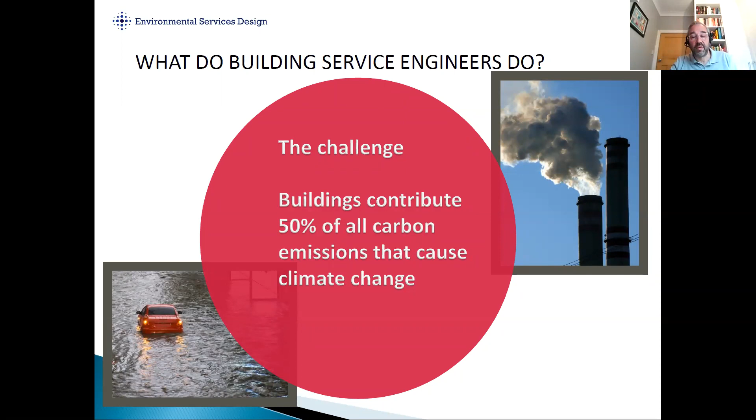The aim, ultimately, by reducing carbon down to net zero, is still to keep buildings comfortable, safe places to work and live, but using ever more efficient equipment and system design techniques. The types of products and systems we design now include LED lighting, photovoltaic solar panels, electric heat pumps used for generating heat in place of boilers, heat recovery on ventilation systems to capture heat often discharged from buildings, solar panels to generate hot water, and passive systems whereby we use the building structure to cool a building overnight using cool nighttime air to save on the energy required for air conditioning the next day. Some of these may be new techniques and terms to you, but they're going to become commonplace and easily recognised through a lot of your adult life.

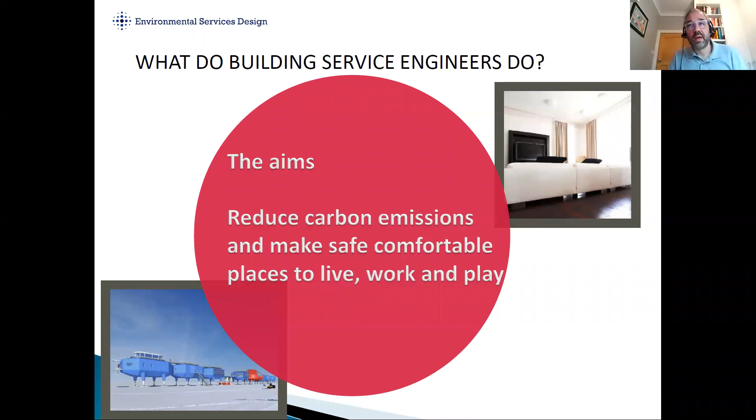In terms of the scheme at South Kilburn, this is a scheme where ESD have been employed by Brent Council, with the architects Pollard Thomas Edwards and the rest of the designers, across 3 of the phases. It's a multi-phase redevelopment at South Kilburn. We've been employed on 3 of those phases over the last 4 years, and within those 3 phases we will deliver over 600 new homes.

Our role, certainly in the pre-planning stage of the scheme, is to look at the building's anticipated carbon emissions and help reduce those, making them comply with the government legislation I mentioned before, and the legislation imposed by the Greater London Authority. Then we look at the planning of energy distribution around the site. At South Kilburn it's quite exciting for us because they have a district heating system that runs with low carbon technology and provides heat to all the buildings.

We look in a very detailed way at how we stop the new dwellings from overheating. The increase in external temperatures through global warming causes a huge problem for residential overheating, and that's something we have to design out at an early stage. Then, ultimately, we plan and design the systems for each of the new buildings and homes within them, everything from TV outlets, Wi-Fi, power, heating, and ventilation that we've touched on before.

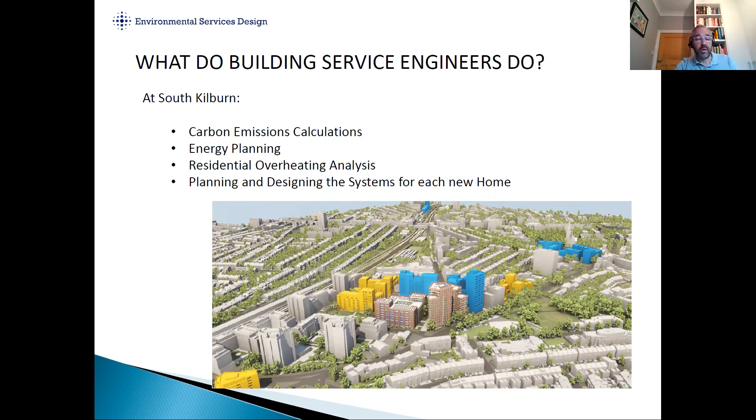Thanks, John. Hi, it's Joe Lingard. So as John was just saying, physics, science and maths really are an integral part of engineering. It underpins everything we do in the design and calculation aspects of the job. Different projects, different designs and different engineering are all going to be based on fundamentals found in physics. We use different calculations for different projects - if you're a structural engineer you'll be doing a different calculation to an electrical engineer, and likewise mechanical. But it all draws back to the basic principles of physics, maths and science, and it's wrapped up in calculation software tools now, which makes our lives a lot easier. It's fundamental knowledge essentially at this early stage.

So what calculations and formulas do we need to use, and why do we need to use them? We calculate voltage drop for electrical systems to ensure the system is as energy efficient as it can be. We calculate light emissions from different sources, whether internal or external lighting. We calculate the thermal transfer between materials, to work out heat losses and gains from buildings. And we calculate pressure losses in pipes and air ducts so we can size pumps and pipe work properly.

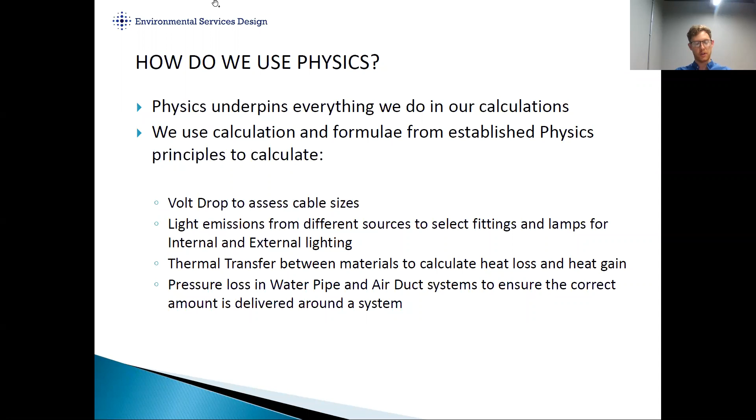So yeah, I'm going to pass you over to Will now, who's got some more examples of physics equations he's going to run through quickly. I'm Will, and unlike Joe, I'm a mechanical engineer, which means I deal more with the heating, cooling and ventilation side of buildings, rather than the electrics. We have to use some equations you can see here. The one on the top left, specific heat capacity, is the most basic and fundamental formula I use in my day-to-day work, as it works out how energy equates to different mass and temperature. We use that fundamentally for working out how much water needs to go down a pipe. We also use more complicated ones - you might not know it, but that's Bernoulli's equation, which relates pressure, velocity and the amount of water going down a pipe.

We can use that as the first principle, rearrange it, and use it to get the equation in the bottom left, which is the equation used for an orifice plate. An orifice plate is something in a pipe that you can use to measure the flow down the pipe, using the difference in pressure at two different points, two different widths.

It'd be quite hard to do that from first principles every time you needed to measure the amount of water going down a pipe. So instead we put it into software, or a table, and we can just use the pipe size and the pressure difference to make it easier for us, without having to go straight back to the complicated equations.

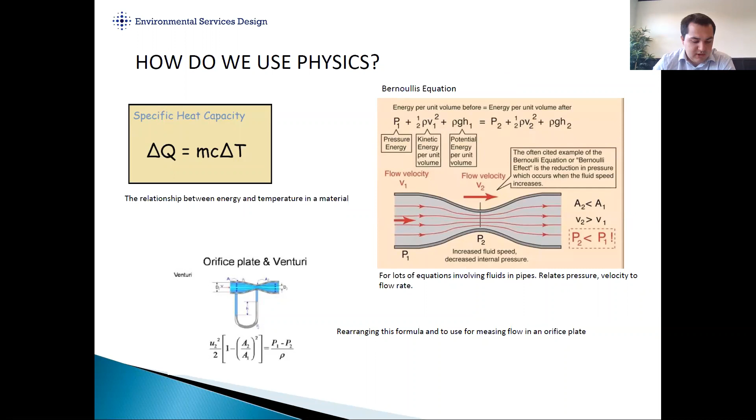Yes, there's another example here of how we use physics, this time in electrical engineering. We've got Ohm's law and a power equation, used to calculate voltage, resistance, and current in electrical circuits. Some of this work was done by German physicist Georg Ohm back in 1827, and it still holds true today. It's used daily in electrical design tasks to calculate how much power a circuit has or needs, and we use it to size cables, protect devices, and carry out load assessments. You can analyse systems and make sure they're operating correctly. It's not just used in building services, it's used in electronics as well, and a wide range of other topics.

So these form the foundation of first principles, but as engineers you need to have that basic understanding of them. As Will alluded to, we combine design tools and software so that we can carry out our tasks quicker, without having to go back and do complicated equations all the time. The standard tables and design software help us do that, but it's all based on these first principles we're showing you today.

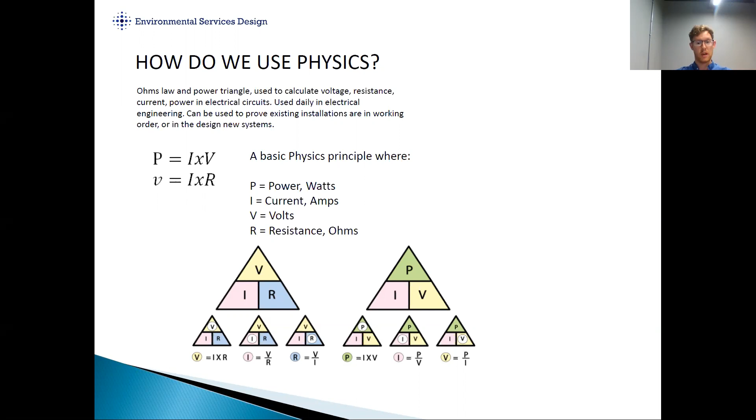Moving on to the next slide, there's another example here of a physics and mathematical equation used in lighting design, to calculate the lighting levels in a room or space - the inverse square law. The basic intensity of light decreases with the distance from the source. Using this equation and others like it, we can calculate the amount of lux, or light intensity, on a surface at a specified distance.

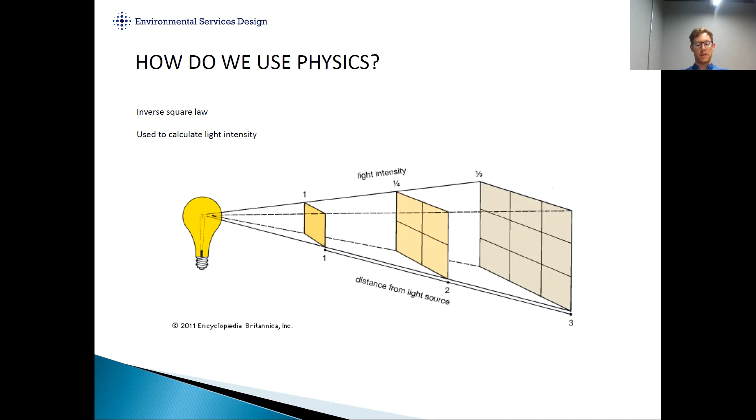So these formulas and equations form the backbone of the software that we now use. We'll generate a 3D model nowadays, and we can position lighting in certain areas to make sure we're achieving the levels that we need. Next slide, we've got some more software tools.

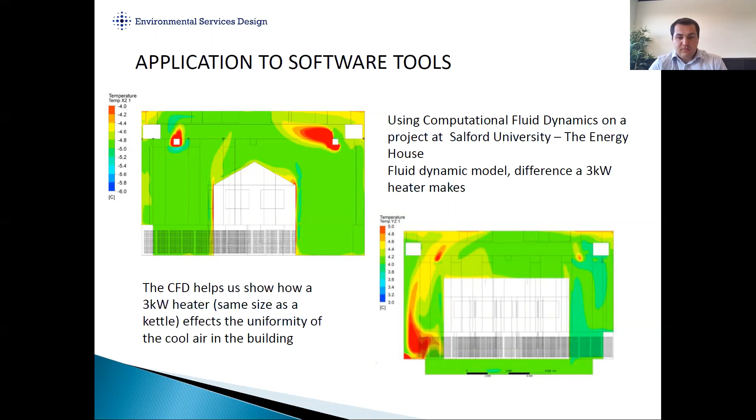And make sure it's hitting your specified levels. You work to design guides and criteria. So in this particular project down in Norwich County Council Chambers, a large refurb project, they had a large marble wall and we were providing internal lighting to that space. We wanted to make sure it was well lit, but we weren't going to be having glare issues from the marble wall. So we've set the calculation up, as you can see, and we've specified certain calculation planes at different locations.

This is based on similar equations to what we highlighted before. It's just another way that it's applied to this sort of software, and it's easy to manipulate. Once you've built the model, you can play around with the light positions until you get the desired outcome. And our job would be to then produce drawings in CAD or Revit, so an electrician can go and install that lighting where it needs to go.

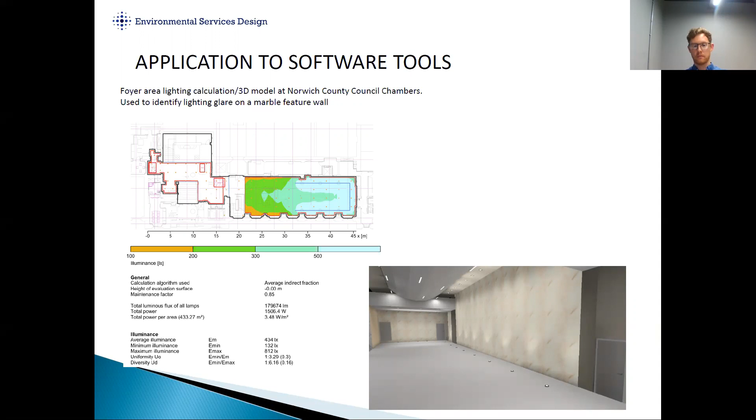We're going to move over to some examples now. Will's just going to run through.

I said earlier that the specific heat capacity equation is one of the most common equations that we as mechanical engineers use. So this is just a quick example of how we'd use it. I don't know if you've got a pen and paper or a calculator and want to try and work it out as we go, but I'll talk through it anyway.

So what we're thinking of here is if we've got 2.8 kilograms of water flowing down a pipe, and we know that the water's flowing at, say, 80 degrees and coming back at 70, so there's a difference of 10 Kelvin or degrees. We want to work out how much heat that is depositing to, say, the radiators or the other equipment that's at the end of the line.

So we can then use this Q equals MC delta T equation. The Q would be the energy or the power that we're getting at the radiators. The mass is the 2.8 kilograms of water. Specific heat is given for the material, so 4.182. And the delta T is the difference in the flow and return, which is 10 degrees. So if you put those numbers into the formula, you'll get the 117 kilowatt value.

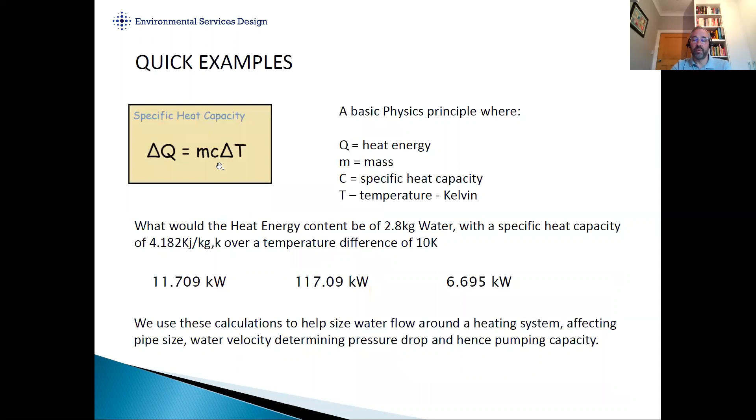And then we can apply that into this formula, the Q, to calculate how much water needs to pass around the system, which feeds into the schematic that we'll explain. So everything's kind of interrelated, particularly on those elements of the scheme design.

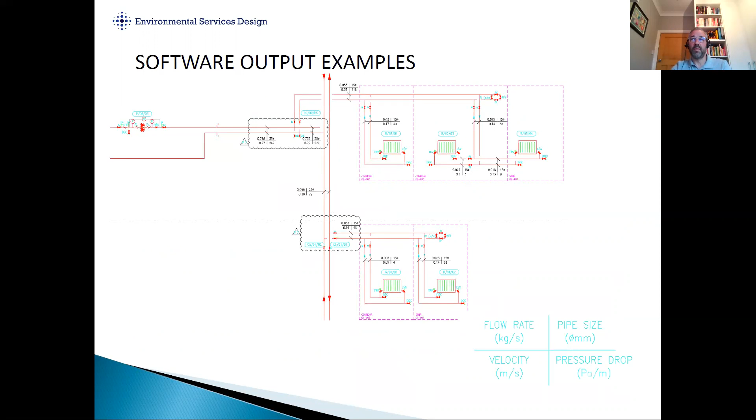The other aspect we can look at with the modelling techniques we have now is to see how a building sits on a site. This is a typical project with a 4 or 5 story building, actually a university building. As we build the geometry of the building into the model, we can look at what the sun path looks like around it.

We determine whether the building's in the right location on the site by moving it to a different orientation, or positioning it in a different part of the site. That could change the benefits or problems from the sun's path around the building. It also helps with determining the best use of things like solar photovoltaics and solar water heating.

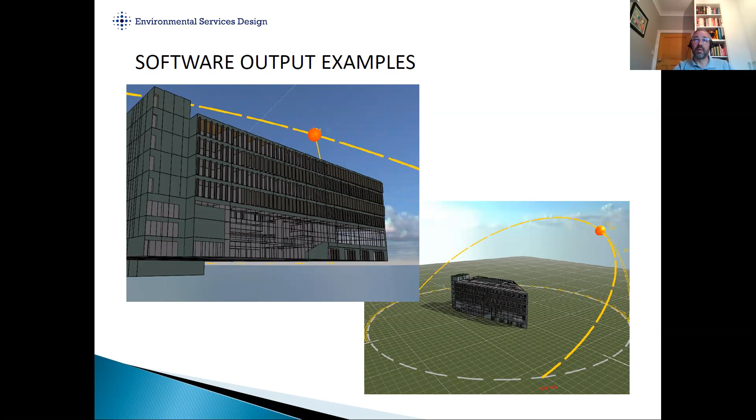We draw these in 3D Revit design, which allows us to make sure all the systems fit within the building and don't clash with concrete and steel work, and that they're all contained within the roof. Then we use this 3D model to create drawings that can be used on site by the electricians, the pipe fitters, the ductwork contractors.

By undertaking this type of design before installation, it helps to eliminate problems on site. It also helps keep the build time down to a minimum, by undertaking all the design work up front.

So that gives you a bit of an oversight as to what we do. I thought it'd be good to allow Joe and Will to explain how they got into the industry with some of their science and maths backgrounds as well.

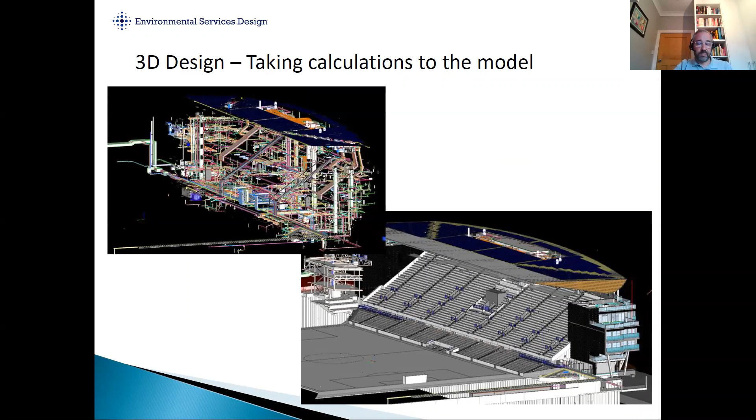I had an interest in maths and science at school. I did okay at GCSE level, but didn't really want to continue in the school environment after school. I wanted to go out and earn some money, so I started as an electrical apprentice, working 4 days a week and going to college.

I started wiring boilers and heating systems for a local plumbing and heating company. That progressed onto larger scale jobs. I worked for myself for about 10 years, had some employees on larger projects, and started to get more interest in planning and design of the services and how it all came together. That led me to enroll on a foundation degree, which progressed to a bachelor's degree in engineering.

That helped me, gave me a new challenge, a new way of thinking about things, and helped develop new skills. I got a job 3 years ago with ESD, and I really enjoy it - it's challenging, but my time in industry has given me good experience that I can lean on when I need to in my current role as a design engineer.

As Joe, I did my GCSEs in math, science, English, all the basic ones, and I carried on and did my A-levels - maths, further maths, physics and biology. Then using those, I decided to go to the University of Liverpool, where I went for 4 years and got a master's in physics. Whilst I was at university, I worked over the summers at ESD part-time, just to earn some money to be able to survive.